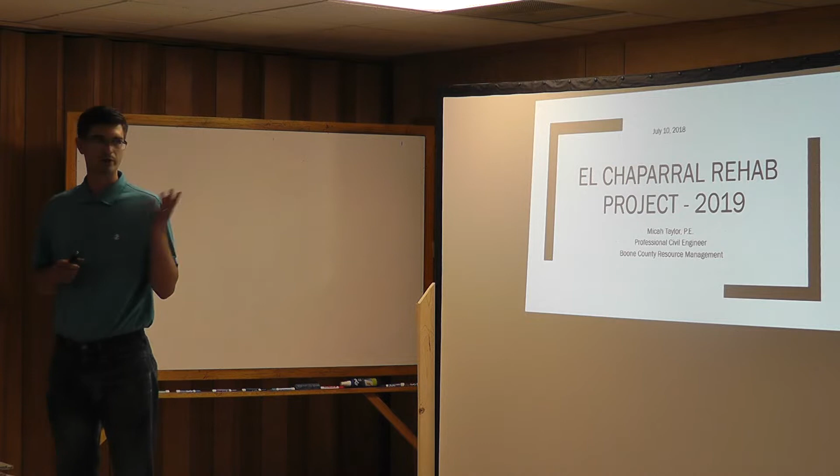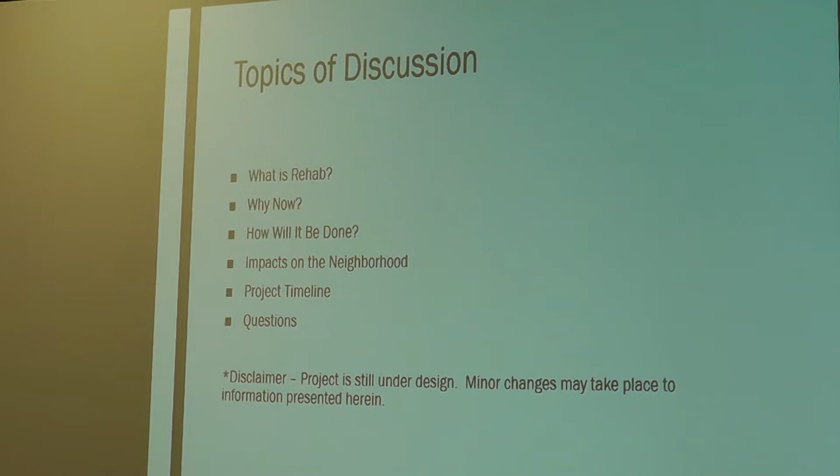Topics I'm going to talk about are what is a rehab project, why are we doing a rehab project now, how will it be done, impacts on the neighborhood, project timeline, and I'll have time for questions. Pam submitted some questions to me earlier. I'll go through some of those, and then we can touch base on just general questions you have.

A little disclaimer I have down here is that the project is still under design. Most of this information is good, it's fine, but there might still be some last minute tweaks. So just keep that in mind. But like I said, I would say a good 90–95% of this information will hold.

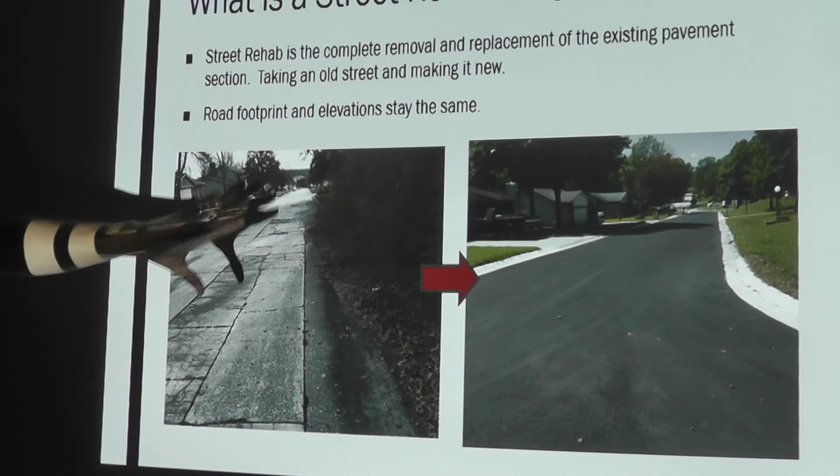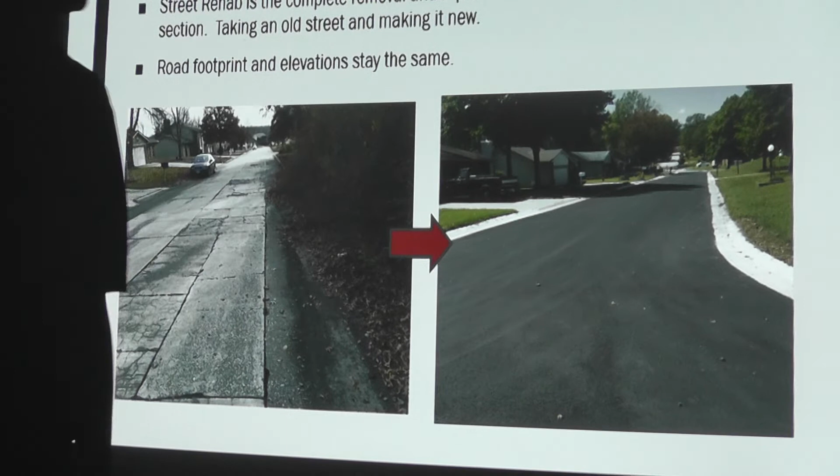What is a street rehab project? Street rehab is basically the complete removal and replacement of the existing street. We're basically taking the old street and making it new again. I know these pictures might be a little hard to see. So this is a rehab project we did last year. As you can see, it probably looks pretty familiar. Got some panels that are failing, some ones that are probably original, and we basically come in and do a whole new street. Minus curb and gutter, but I'll get to that in a second.

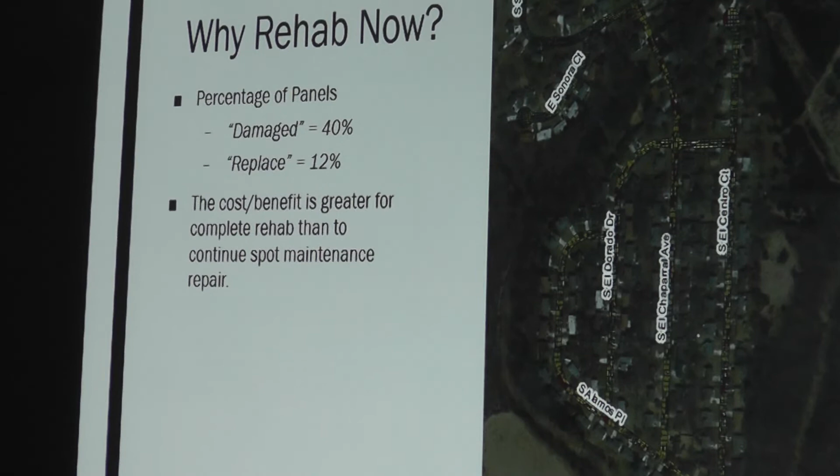Why rehab now? I'll let Charles Barkley answer that question. Basically, the road is not in good shape. And we kind of know this, but how bad a shape is it in? There's about 30 miles of concrete street that the county maintains. And of those 30 miles, we have mapped out those streets to the panel, which is roughly anywhere there's a joint. So that's roughly a 10×10, 10×20 section of road.

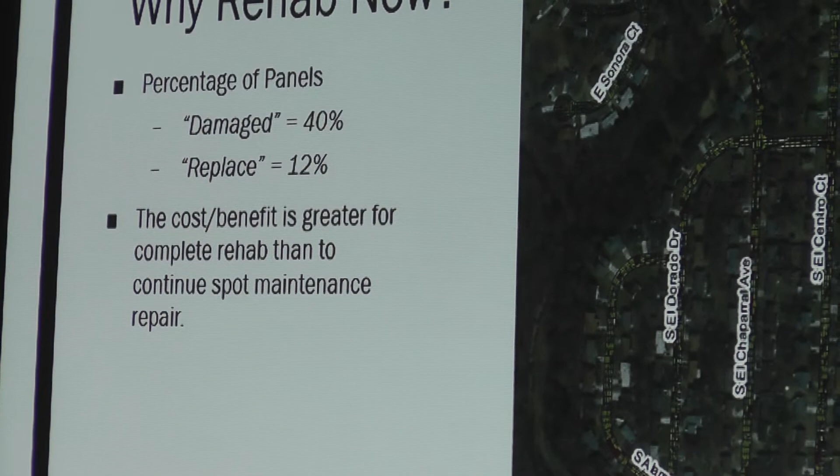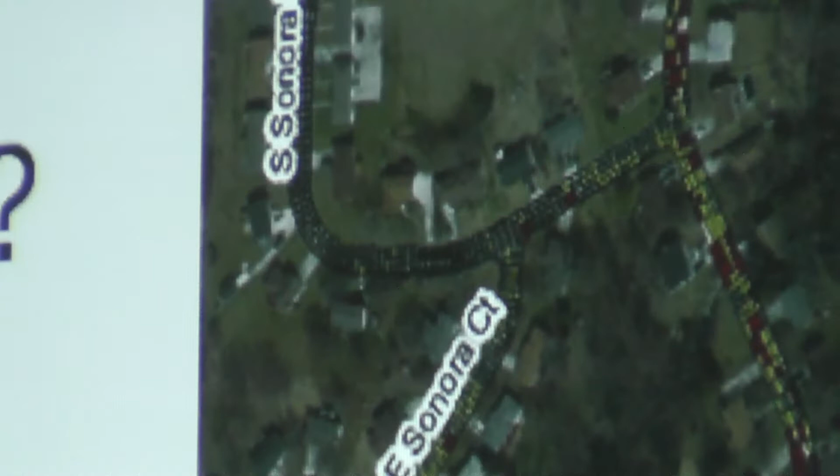I know this picture's not very clear, but every other year we go out and inspect every single panel. And we give those panels a rating. It's either good, meaning that there's really nothing wrong with it, there might be some minor wear to it, or it gets labeled damaged, which means it's got a crack in it, there might be some wear to it, it's just not in pristine condition. And then you'll have panels that we label as replace. So multiple cracks, it's starting to settle, it's losing its structural capacity.

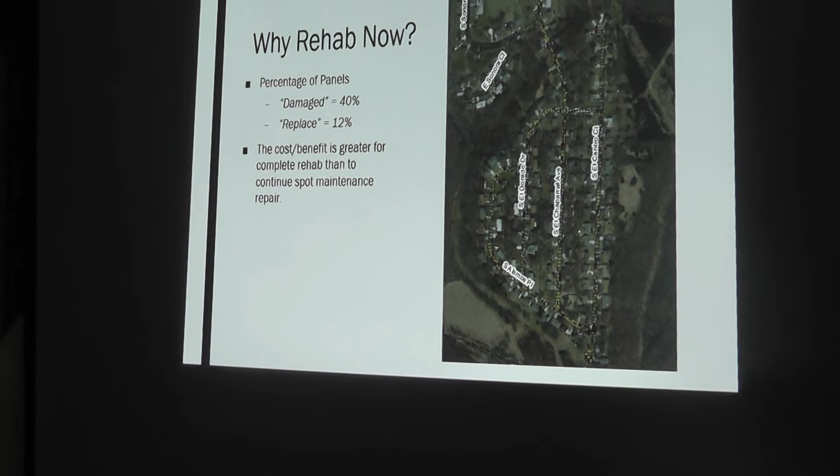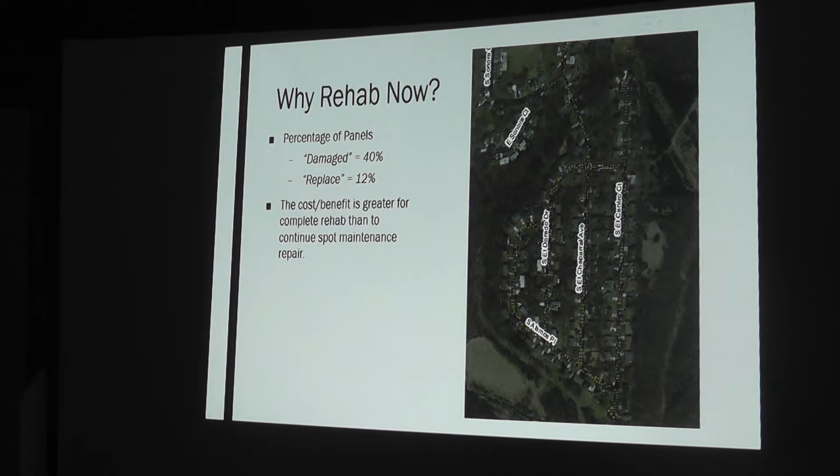So looking at El Chaparral as a whole, 40% of the panels are labeled damaged and 12% need to be replaced. So when we look at subdivisions like this, how we decide if we're just going to do spot repair versus complete rehab depends on these numbers. But sometimes the numbers don't tell the whole story. I don't know if you can see this area, but when you start getting groups of to-be-replaced panels surrounded by damaged ones, obviously we're not going to go in and just replace the to-be-replaced panels when they're surrounded by damage.

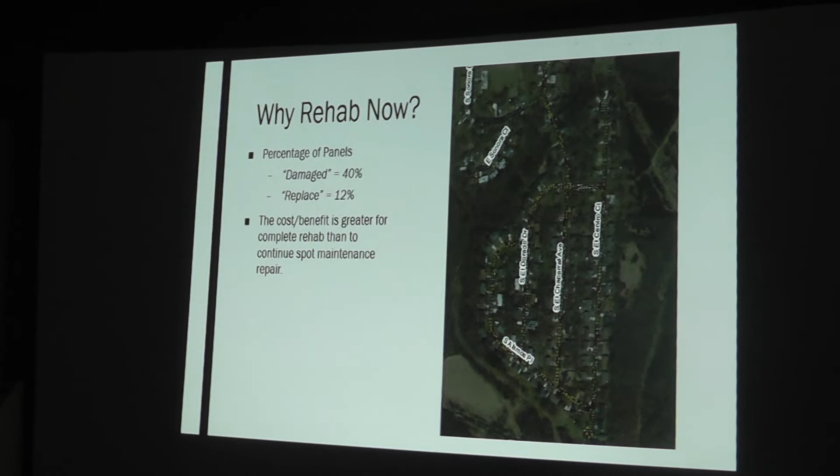So when it gets up in those numbers, it's more cost beneficial to pretty much just start from scratch. And so that's what we're looking at in El Chaparral. And really, those numbers would be higher if it weren't for past work that we've done in the neighborhood. Again, I'm sorry that the picture is a little out of focus, but Sonora Court is in pretty good condition.

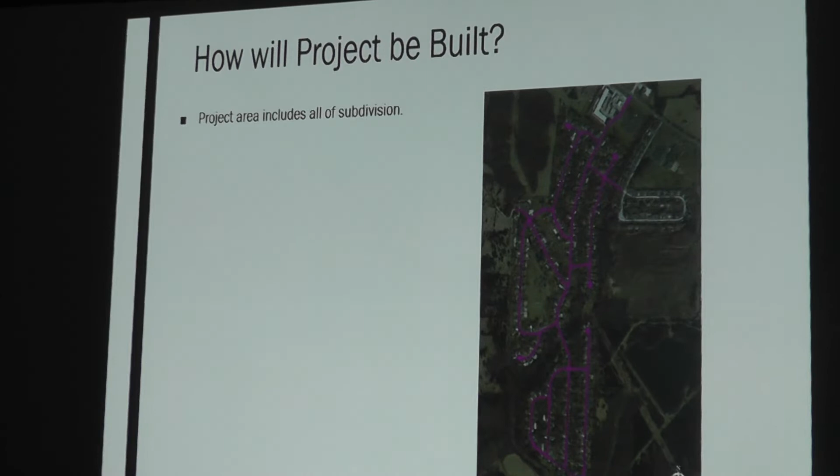How will the project be built? This project does include the entire subdivision minus Rosetta and this loop of Santa Ana. So everything in pink is what we're going to rehab.

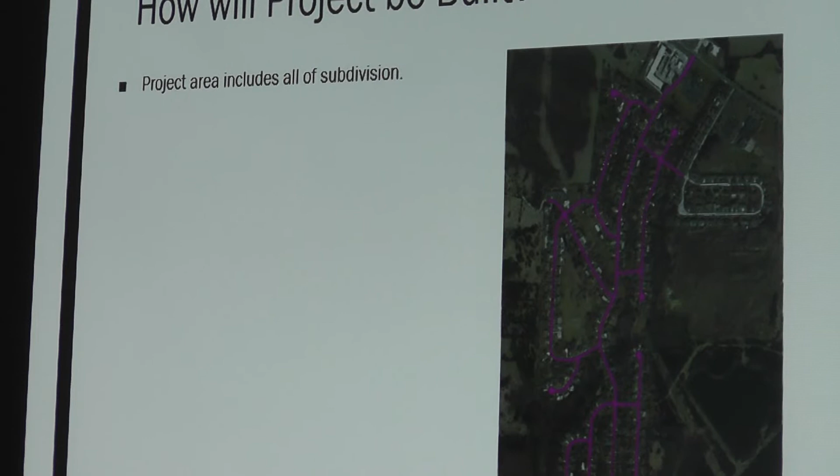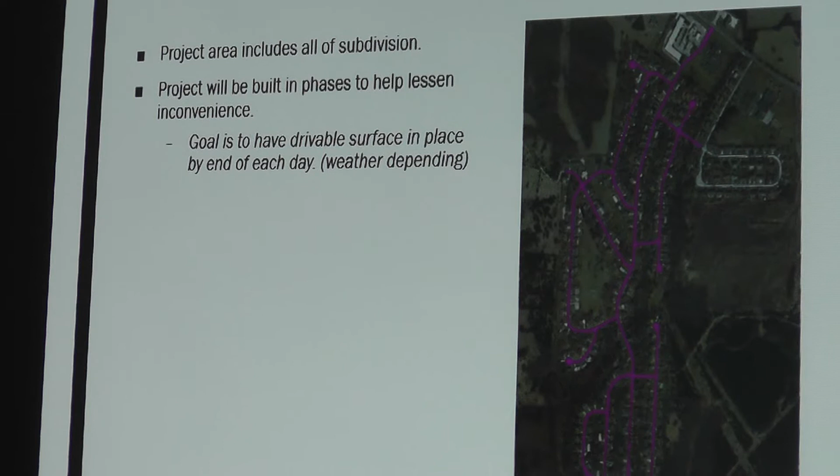The project will be built in phases to kind of help mitigate issues with inconvenience. Our goal is to have a drivable surface at the end of the day. So when we rip out the pavement, hopefully we'll be coming right behind that and putting in some rock or some sort of drivable surface.

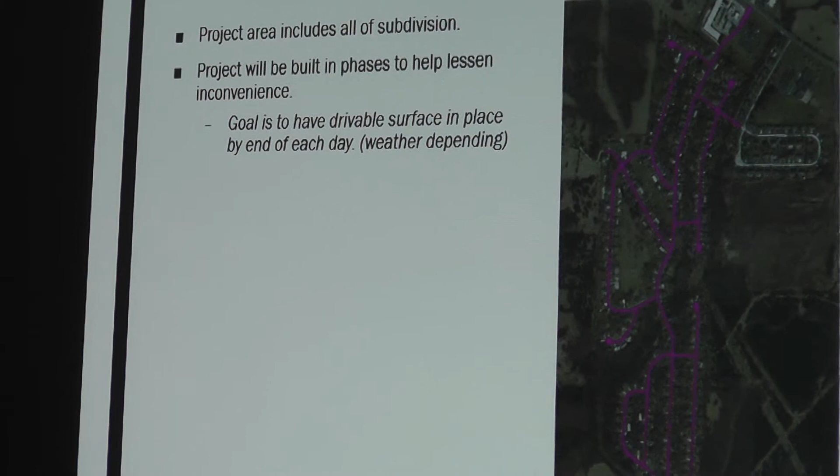What's really going to mess with that is our lovely Missouri weather. As you guys know, and actually I think it happened just yesterday, you guys could get a downpour right in this neighborhood and downtown will get nothing. So sometimes this drivable surface might get affected by pop-up showers, but that is the goal that we're trying to shoot for, to have basically a means that at the end of the day you can get as close to your house as possible.

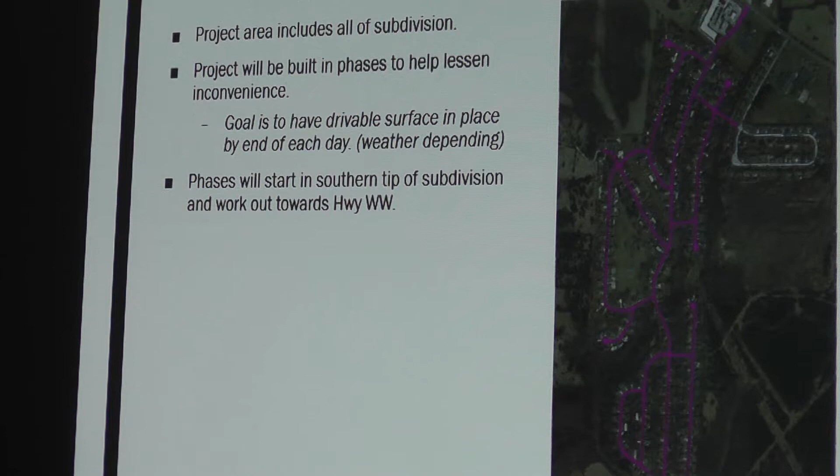So what will you do about the dip and all of us that live behind the dip when you're doing that? I will get to that in a second. Okay. Phases will start in the south. We'll start in the south and we will work our way to WW.

Basically the idea behind that is this project is going to require a lot of heavy trucks. Hauling material in, hauling material out, so it doesn't make much sense to build a road just to have it run over by a bunch of heavy trucks. So we tend to start in the back and work our way out.

The project will be bid with two different options. I put may change because when I wrote this slide, I was waiting on some test results for option 2. And we've since gotten those, but I haven't really digested them yet. So as of now, there's still two options on the table, and I think we'll keep the two options.

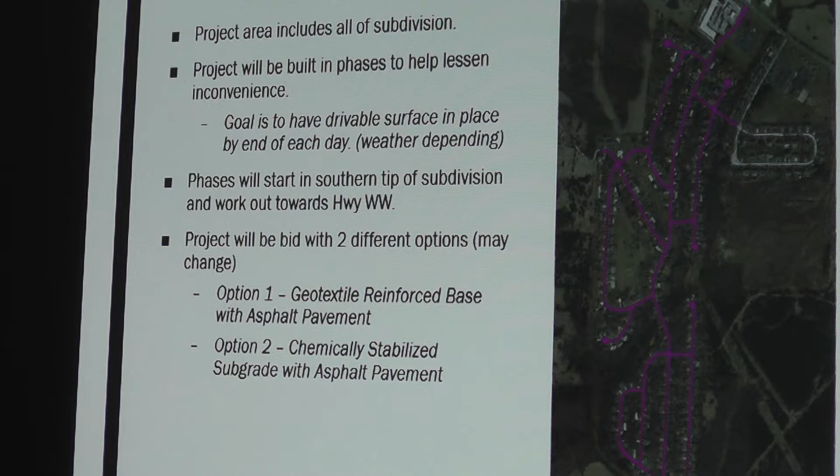So one option is what we call a geotextile reinforced base with an asphalt pavement, and option 2 is a chemically stabilized subgrade with an asphalt pavement. And I'll explain how those are done. So first is the geotextile reinforced base, and I'll go through the steps.

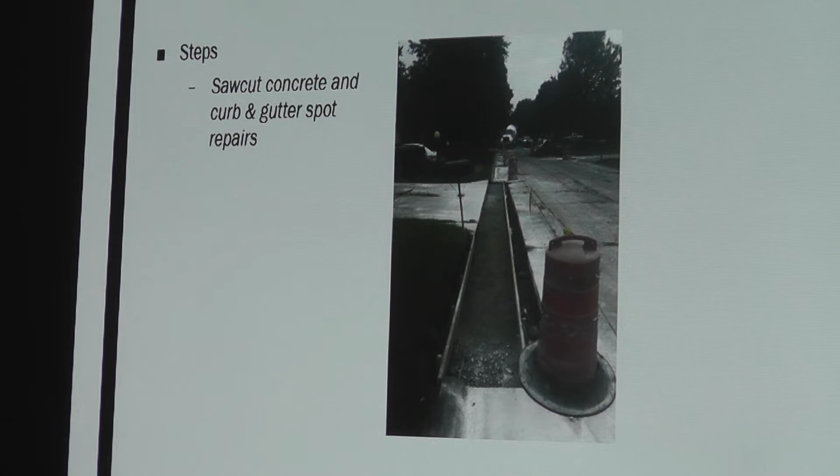So first step is, I mentioned earlier that we're trying to keep as much curb and gutter in place as we can, but we will be making spot repairs. Some of you may have actually seen me walking around the neighborhood. So I walk through the entire neighborhood and I make a judgment. Is that worth replacing? And then I mark all those up, and that's usually the first step of a rehab project, is to come in and make these repairs.

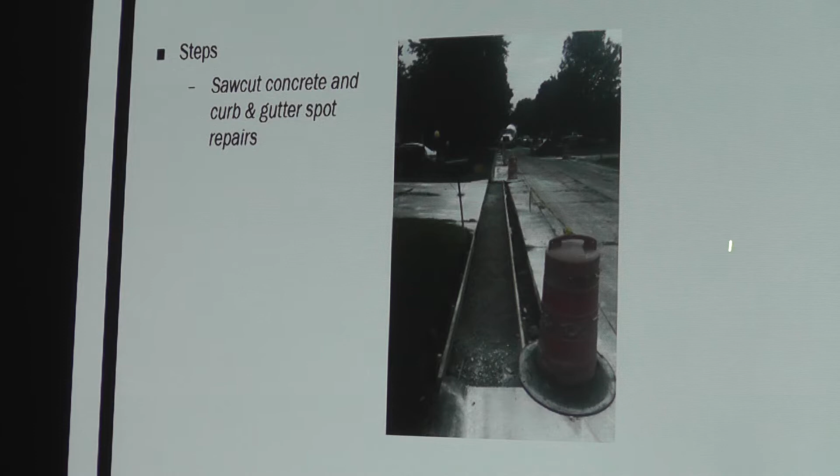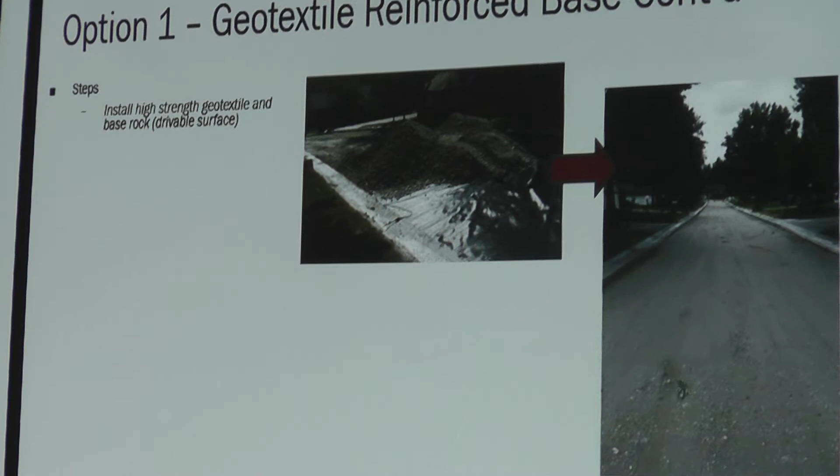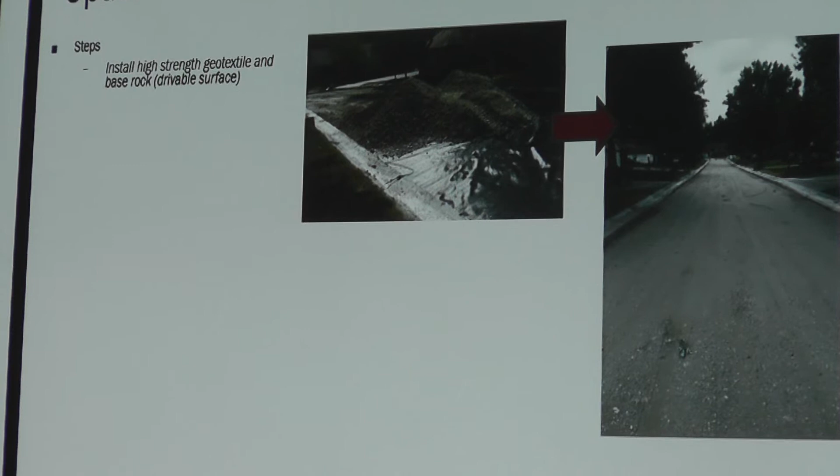And then after that comes kind of the real destructive part, removing the pavement and starting excavation of the underlying soil. You can kind of see that in action right here. Next, we lay a high-strength geotextile fabric like this, and we start bringing in base rock. We bring that to grade and compact it, and it basically kind of looks like a gravel road. And this is what we would call a drivable surface.

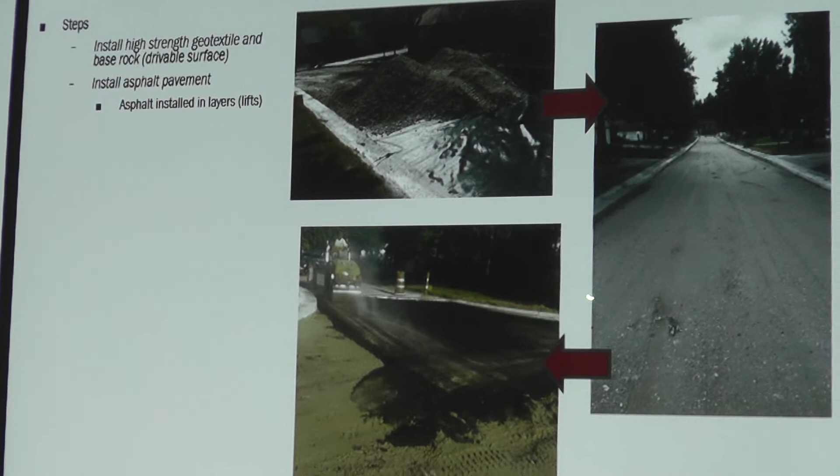Again, it's pretty much a gravel road. We have 400 some odd miles of gravel road in the county, so that's essentially kind of what you might be driving on for a short time. And then after that base is in place, we start asphalt. Asphalt is installed in layers. We call those lifts. Typically, there's 3 total lifts.

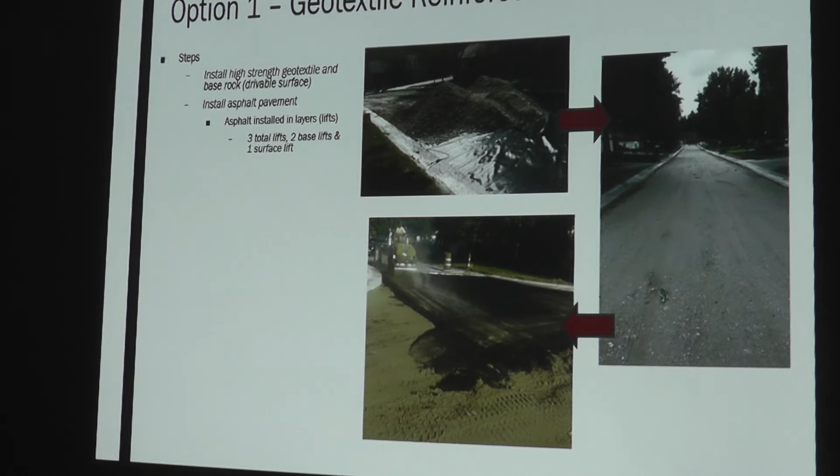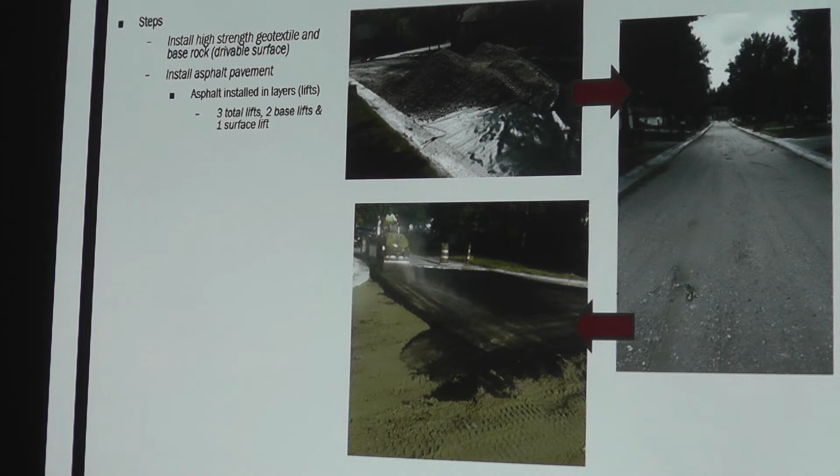We have to limit the thickness of a lift just so we can get compaction on it. The max is about 4 inches. The design calls for roughly 8 inches on this option. So we'll do probably a 3, 3, and 2, or 3, 3.5, and 1.5. And once the surface is done, we're pretty much done.

The surface lifts we will probably hold back on, and we try and do as big an area in one operation as we can. The reason we do that is to limit the amount of joints that are in that surface. The less joints you have, the less water intrusion you'll have, the better your road will perform.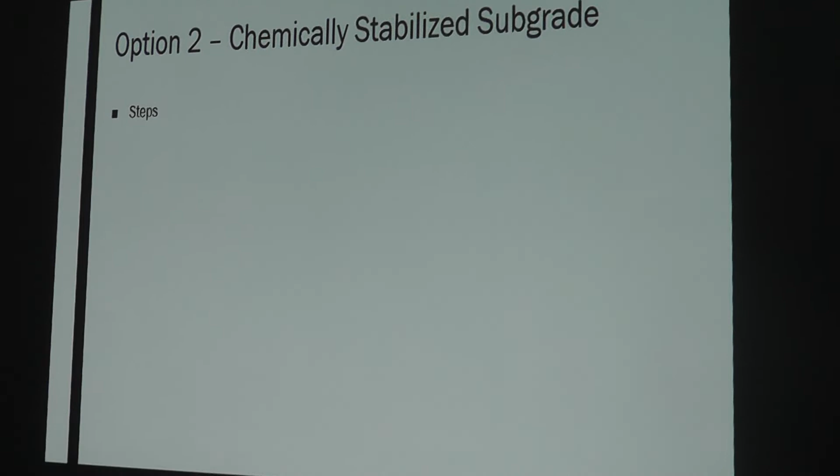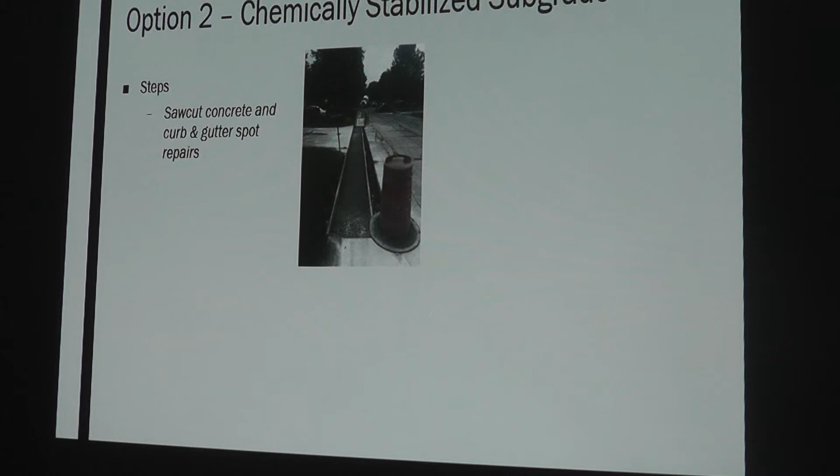Option 2 is a chemically stabilized subgrade. And this is something that we've kind of wanted to try, but we've usually been limited because our typical projects really aren't that large. And this is kind of more conducive to a larger project. And so the steps of chemically stabilized is, again, start with curb and gutter spot repairs, and then concrete pavement removal.

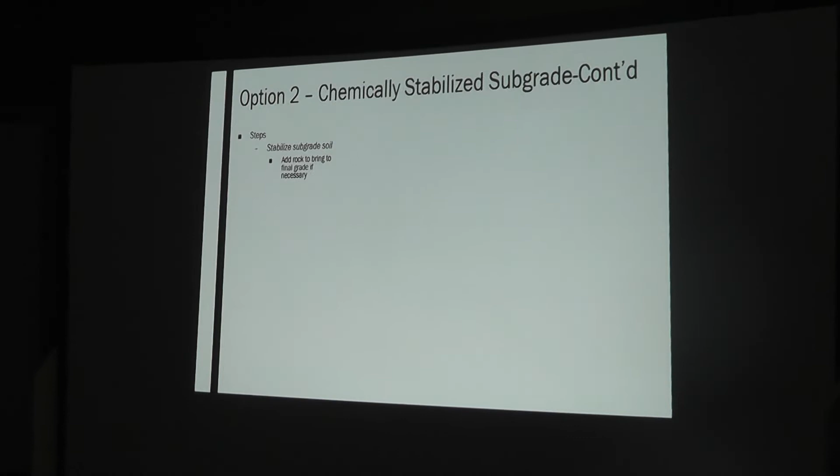The way this subgrade gets stabilized is we might have to bring in a little bit of additional rock, because once we compact this layer that we stabilize, it'll get compacted down, so we need a little bit of material so we reach our final elevation. So we might need to bring in a little bit of rock.

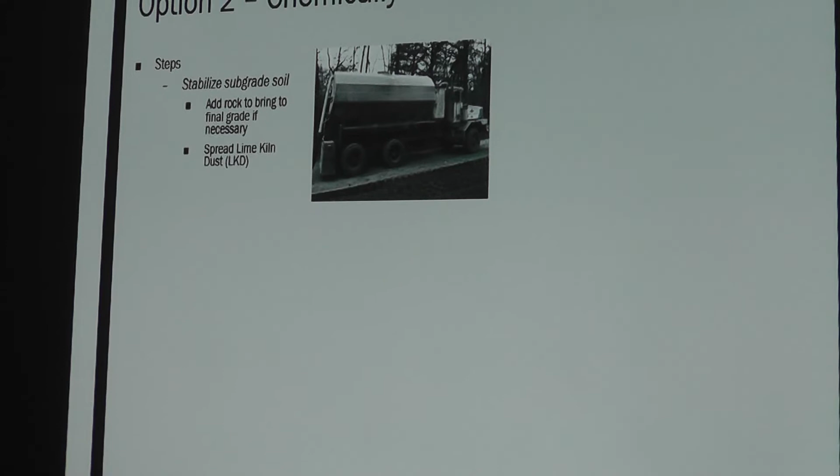And then the chemical we use to stabilize, or one of the chemicals you can use to stabilize, is called lime kiln dust. It's a byproduct of the lime manufacturing process. It dries out the soil and kind of imparts a type of cement bond. It's not as strong as cement, but it's like cement. And so that gets delivered in a spreader truck like this.

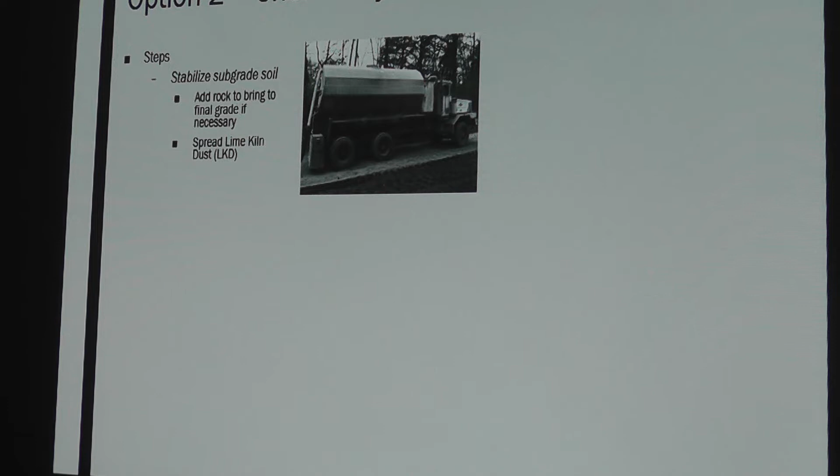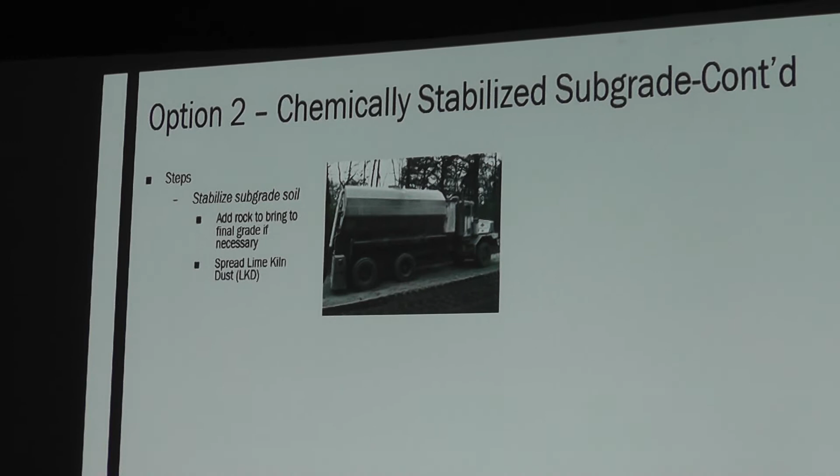It is a fine dust, so there are trucks out there, and I've spec'd the truck in the project. There are trucks that have a mounted vacuum circulation system to try and keep that dust down. Given that this is a residential neighborhood, we're going to try really hard to keep that dust down. So I expect that these trucks should be equipped with that type of machinery.

Once the lime kiln dust is spread, a machine similar to this comes in and mixes the chemical into the soil. Right here is a large drum like this that's full of teeth. That drum spins, mixes the soil. There's a couple different versions of a stabilizing machine like this. This is a self-propelled one.

You can get basically the brains of the machine, the spinning drum, as a standalone thing that gets pulled by a tractor, or a standalone attachment that gets attached to a different piece of construction equipment.

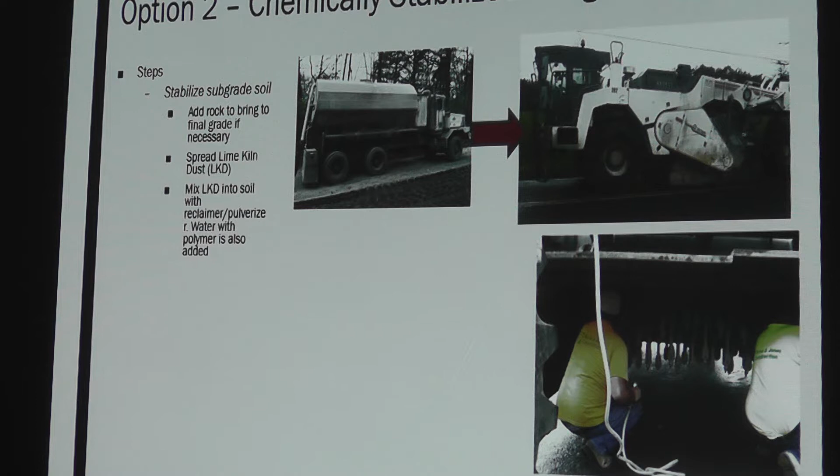And so this machine will go along, mix up the soil, and then it has a hose that attaches to a water truck, adds water to the lime kiln dust, activates it, and then right behind the machine is a compactor that compacts the soil down. Once that's compacted, it'll cure for 5 to 7 days. But local traffic should be able to get on the soil right after that compactor. So that would be your drivable surface in this option.

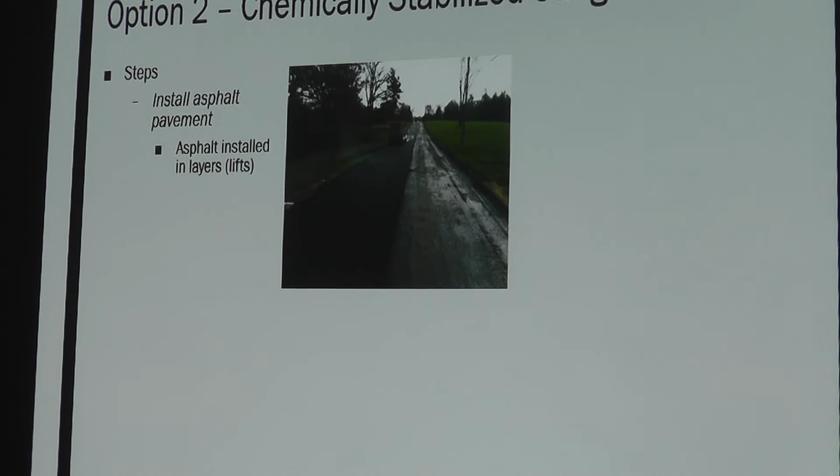Once it's done curing, it'll be, again, a very hard, essentially dirt road. And then the asphalt will be put in place. And again, asphalt will be installed in lifts. This particular design, the asphalt thickness, I think it's going to be a little bit less. So they might be able to get it done in 2 lifts. But worst case scenario, it's going to be 3 lifts again.

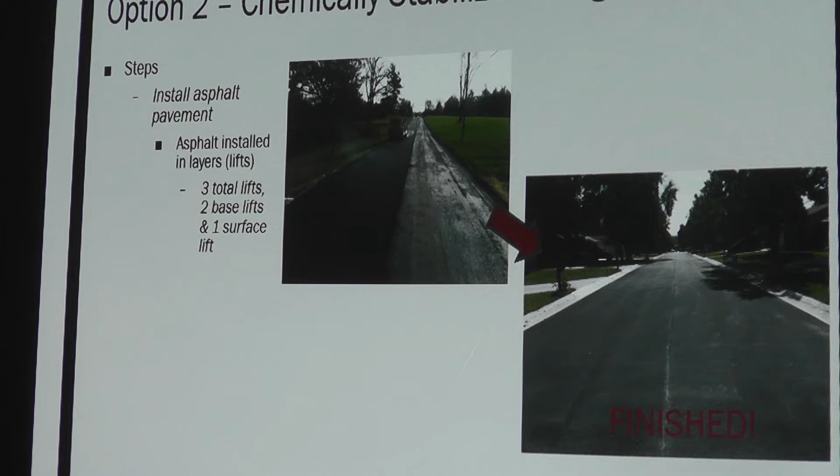Impact on the neighborhood. I'm not going to sugarcoat it. This is going to be a noisy, dusty, very inconvenient thing. Sounds like it. Yes. Right. Like I said, I just want to put that expectation out there. I mean, I've done this 4 or 5 times now.

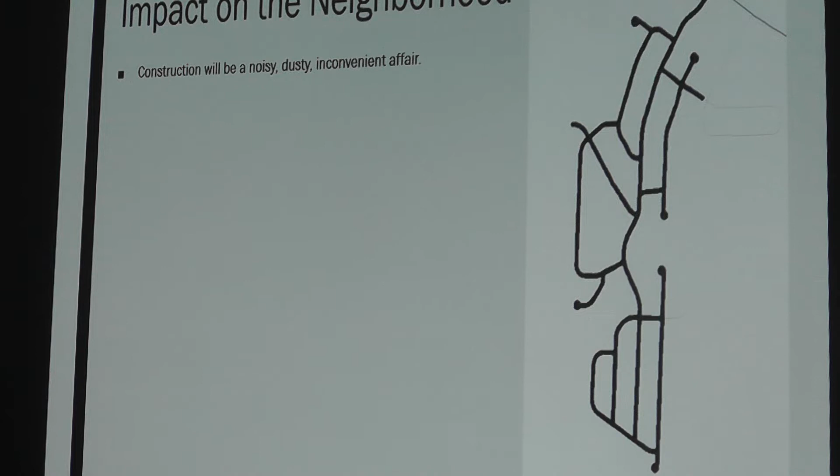And the way we try and combat that is we try and just keep our heads down and get through it. Let's try and get this project done as quick as we can. That way you guys can get back to normal life.

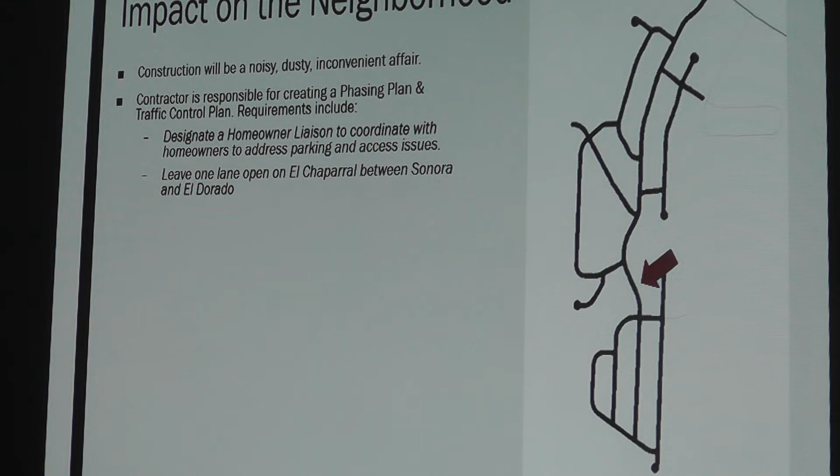One of the questions that Pam submitted to me was, when will my house be affected, for how long? That is not an easy question to answer, given that there is no way for me to guess what a contractor is going to do as far as how he's going to tackle this project.

And so the way we handle it is we require that the contractor submit to us his phasing plan, traffic control plan. And a requirement of that plan is for him to designate what we call a homeowner liaison. That liaison is responsible for coordinating with you guys on a day-to-day basis. So typically what's done is he knocks on the door, maybe puts a postcard in your mailbox and says, I need you guys to park over there. I'm going to be working from here to here.

Again, we kind of do this because, you know, I can make a 5-page plan of the different stages, but a contractor might say, well, that's not really efficient for my operation because I can put 20 guys on this project. But another contractor might say, well, I'm going to do it in smaller chunks, so I'm going to have 5 guys. So that's why we don't really make the plan. We let the contractor who knows his crews, knows his abilities, submit the plan to us.

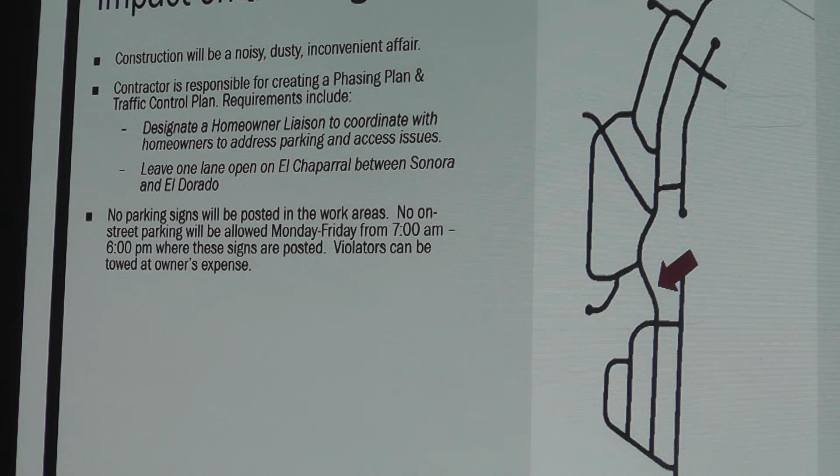The county has a lot of these small no parking signs that we sometimes deploy on these projects, and basically the sign has reference to an ordinance that gives us the authority to tow people that might have a vehicle that's been left and we can't find the owner. And so to keep things moving, we put these signs out that say no on-street parking Monday through Friday, 7 a.m. to 6 p.m. Again, some contractors will put in 4 12-hour days, so they might actually follow this 7 to 6 p.m. Some might say, well, I know there's going to be a lot of traffic at 5, so I'd like to get out of here by 5.

So again, these signs, you need to pay attention to them. However, again, the person to follow instructions from will be the actual contractor. Our on-site inspector might also get involved, but really the contractor is in charge of his work site, and so he'll have the control and hopefully the wherewithal to tell you where you can park and where it might not be too good of an idea to park.

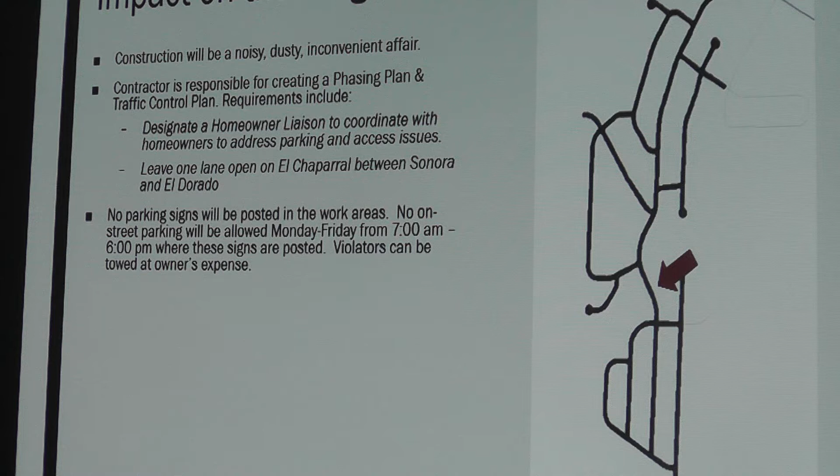Like I mentioned before, the goal is to have a drivable surface at the end of the day. And like I mentioned before, weather can affect this. I put it in the contract that the drivable surface can only be in place for a max of 10 working days. A working day is Monday through Friday, and I think the technical term is a day on which they can work 6 hours unimpeded due to weather. And so that drivable surface, whether it be the stabilized subgrade or the reinforced rock base, should only be in place a max of 10 days. It should be less than that before the first lift of asphalt is down.

We like to get that first lift of asphalt down as quick as we can, mainly to keep water from getting into the underlying soil, the rock base. Once water gets in there, it can start losing a little bit of its strength. So we push real hard to get that first lift on. Direct driveway access might not be available until the second lift. That second lift, or the final lift, is typically 2 inches to 1.5 inches. So there'll still be a little lip right there in front of the driveway.

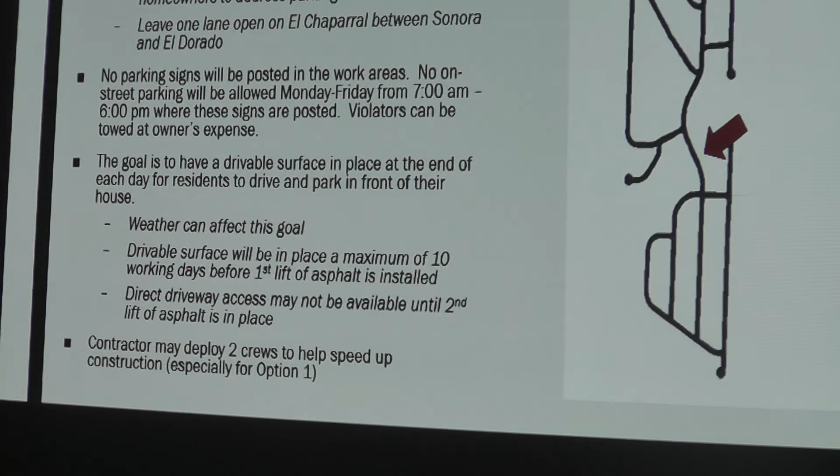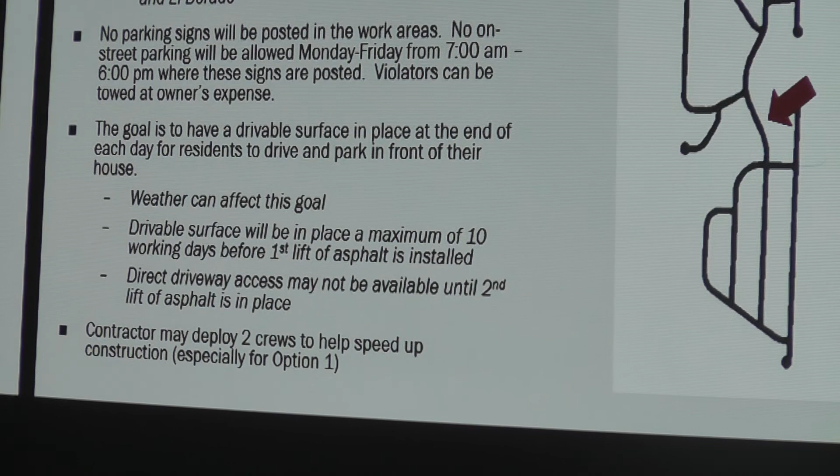One thing I'll mention is that there is a possibility that a contractor might try to deploy 2 crews to get this project done faster. This is something that I think we will suggest, but it's not a requirement. So the way that would work is that there would be 2 demolition teams, one starting here and working on the south bulb, and then probably one starting at Sonora Court and working on the side streets.

And then those 2 operations will probably get done pretty close to one another, and then it would just be El Chaparral to try and work our way out. Again, it's not a requirement, but there are some contractors out there that their business model is speed, and so they might do the math and say it's better for us to do this.

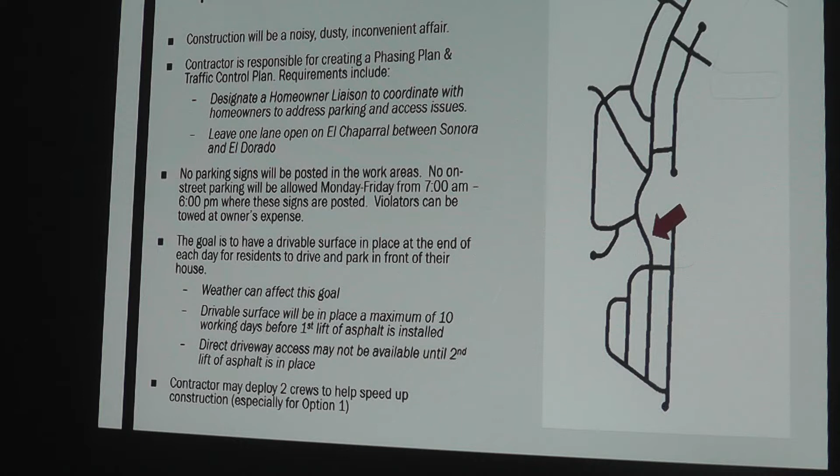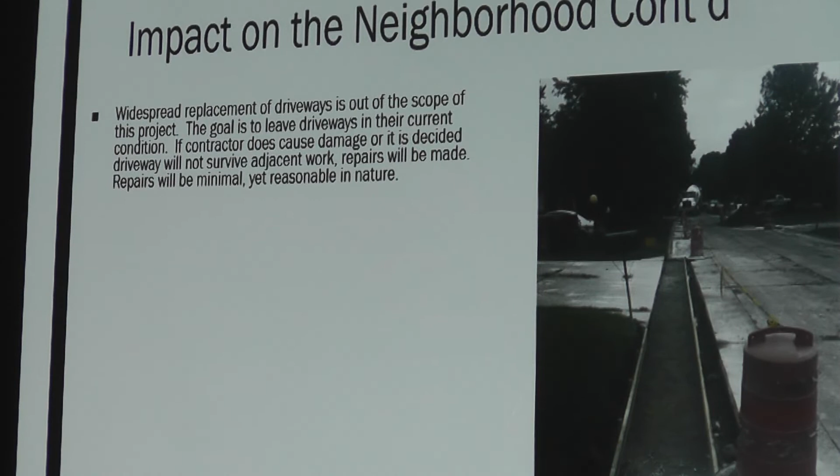Widespread driveway replacement is out of the scope of this project. There will be curb and gutter repairs in front of driveways like this. So we try and be as careful as we can to get that repair done. You know, walking through the neighborhood, I do know that there's driveways out there that are not in great shape. So even working near them might cause a problem.

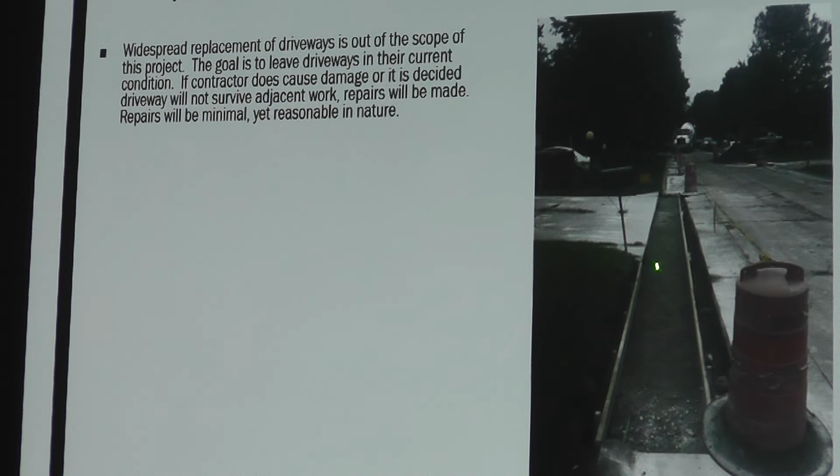So if a contractor does do some damage, we will repair that. But I just want to put it out there that our repair will probably be as minimal as we can, but as logical as we can. So what I mean by that is, concrete has joints in it. So it makes sense to try and take it to the closest joint. But if your closest joint is 10 feet away, we're not going to replace 10 feet of driveway just to get to a joint. We'll probably cut back maybe 3 feet or something.

Like I said, our main goal is to leave stuff in the condition it's presently in. We usually go around, take pictures of every driveway, just so if there's some disagreement, we at least have some record that says, well, you might think that crack is new, but we took this picture a week ago and it was there, and we weren't here yet. So just something to keep in mind.

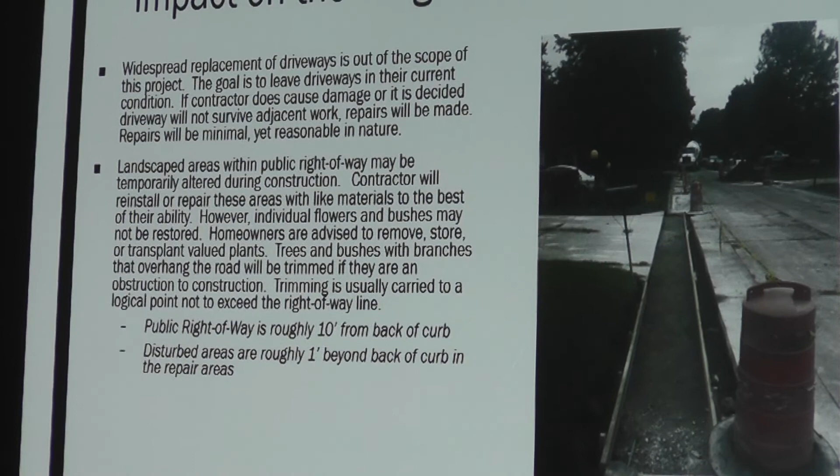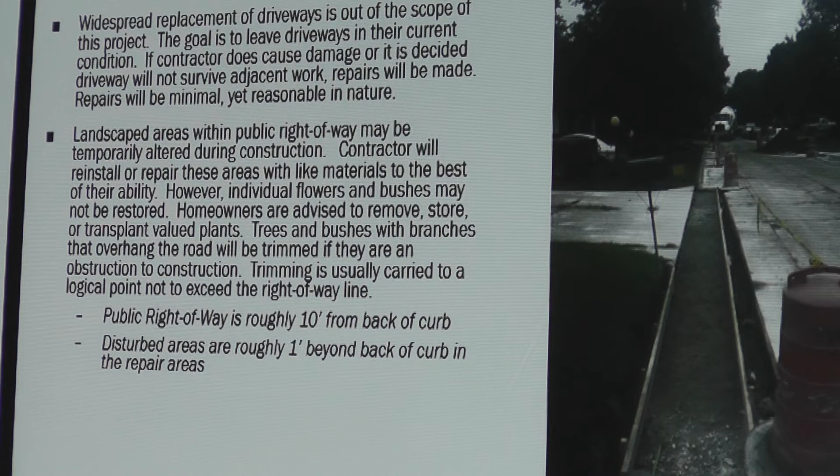Landscaped area and public right-of-way. Landscaped areas can be disturbed. If they are disturbed, we have it in the contract that the contractor is to restore those areas with like materials. So in this instance, there's a mailbox right here, and if you had a flower box or something around this mailbox and you had nice brick pavers and whatever, the contractor might take those, set them aside, do this work, and then he's supposed to put those back and remulch.

Now, one thing I will say is individual plants, trees, bushes, probably something that we won't mess with or won't replace. So I have it in the contract that the contractor, if he comes across things like that, he should knock on the door and at least give you the chance to dig them up, transplant them, do whatever you see fit.

The other thing is trees. This is another good picture where you can kind of see this concrete truck and these tree limbs. Dump trucks are pretty bad at catching branches. Once they raise that bucket, they're already a tall vehicle, so now they're twice as tall. So if we need to trim trees, we will. Again, we'll try and do that in as clean a manner as we can, and as little as we can. But the place that we typically stop is the right-of-way line. Public right-of-way is roughly 10 feet from back curb.

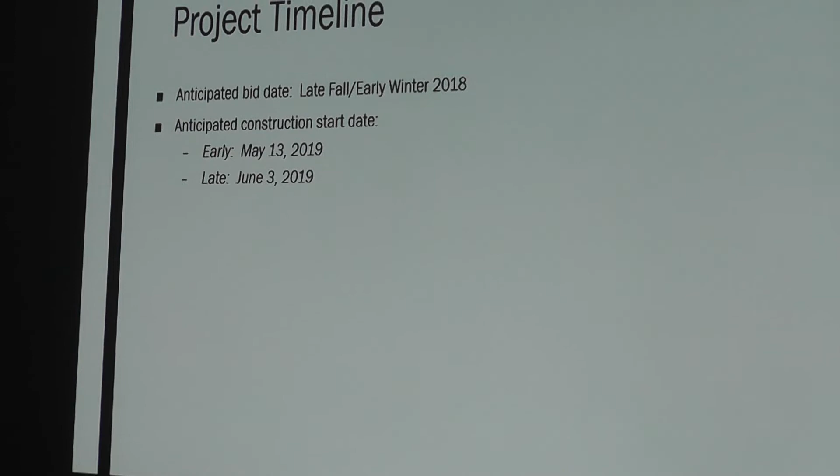Project timeline. Like I mentioned before, the project is under design right now. Anticipated bid time is late fall to early winter of this year. Anticipated construction start date, we're giving the contractor a window, basically saying you can start as early as May 13th of 2019 or as late as June 3rd.

Something different that we're going to try with this project is the bidders will submit their own timeline. Typically on projects, we say, we want you to reconstruct the street from A to B. You have 40 weeks. And if you go over your 40-week mark, you get charged what we call liquidated damages, which we set differently for different projects. Sometimes it's $500 a day, sometimes it's $1,000 a day.

But on this project, since it's so large and we have the two options, it's hard to really gauge what sort of contractors will bid this project. We might even get some larger out-of-town contractors. And so we thought the best thing to do is not say, okay, you have 35 weeks. We said, how about you tell us how much it's going to cost and how quickly you can do it. And so we're going to evaluate the bids on a dollar per day type of situation.

That way, like I mentioned before with the two crew situation, if we have someone that says, hey, we can get this done in 20 weeks, or roughly one season, I think that's good news for you guys, that's good news for us, but is that $1 million more than someone who's going to do it in 40 weeks? I can't answer that. They can answer that, and they will answer that when they submit their bids.

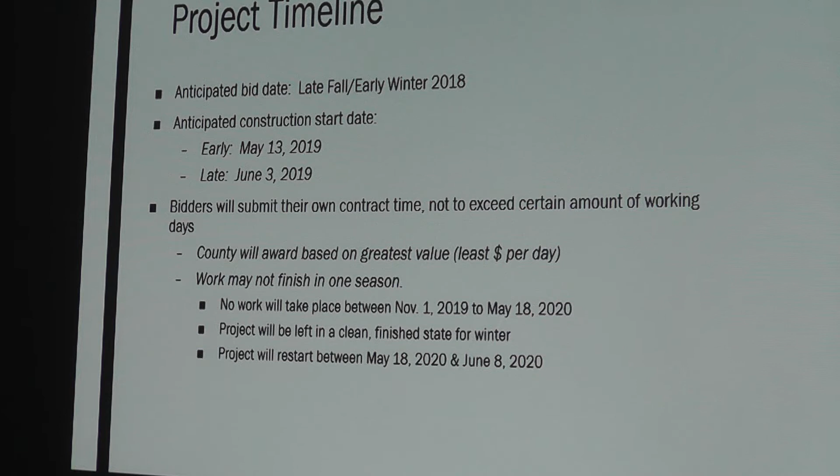So we've set in the contract that work will cease November 1st, and the work will be taken to a finished state. So that means, let's say we were going to do this project in smaller increments that spanned multiple years, we would stop at an intersection or somewhere that kind of made sense. So that's kind of a requirement that the contractor needs to pay attention to what he's doing and not just say, oh, it's November 1st, I'm gone.

He will leave it in a finished state, and basically no work will happen through the winter. And then work will start back up again in May of 2020. And hopefully it will be done by the end of that season. And again, that's where the maximum days come into effect. So we could get a contractor that is going to say, I'm going to go ahead and put my contract time at the max you gave. Well, if he starts running over that max, liquidated damages are going to kick in.

And for this particular project, since the contractors are picking their own time, to dissuade someone from being like, oh, I can get it done in 3 weeks, that's a guaranteed job for me, well, we're going to jack up the liquidated damages pretty high. So hopefully that will kind of keep them a little bit honest on that.

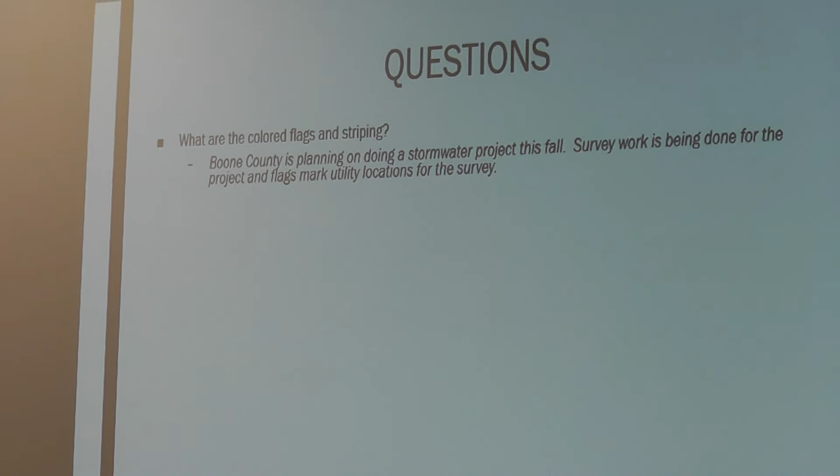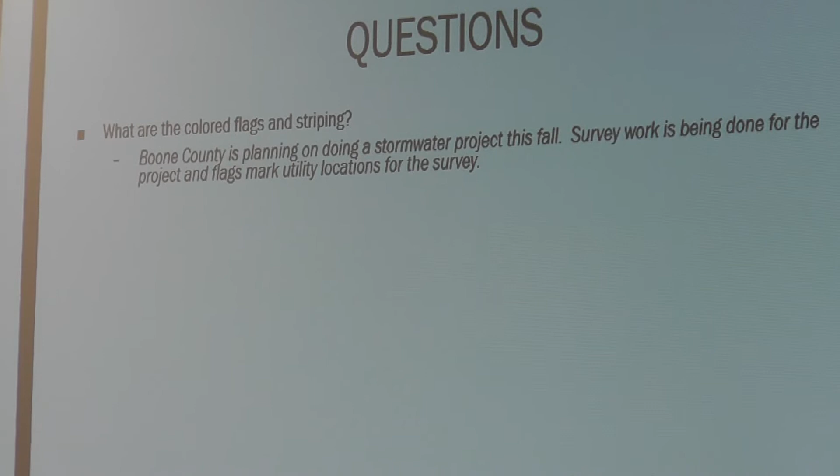All right, and these are prepared questions that Pam submitted to me. What are the color flags and striping through the neighborhood? In preparation for next year's road rehab, we evaluated the stormwater situation, and we discovered that there's a couple crossroad pipes that are in bad condition. So our surveyor's been in the neighborhood collecting survey data, and I'm hoping to squeeze a project out this year to replace those stormwater inlets and pipes.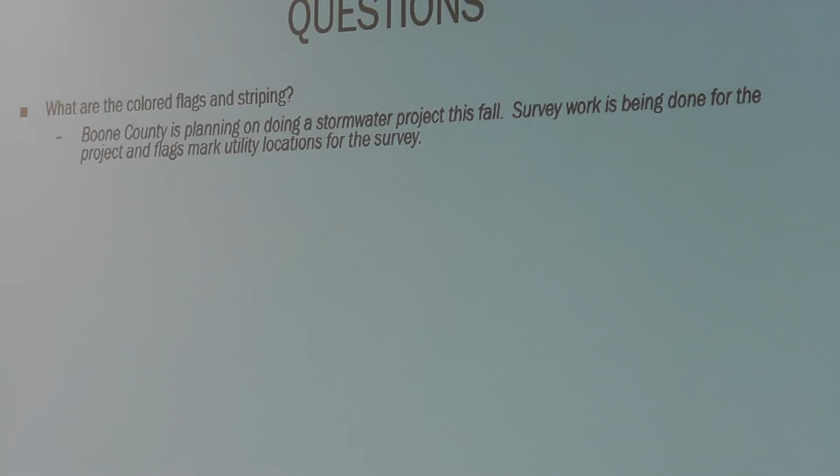There's 4 locations. One is next to Pam's house, one is on El Dorado, kind of that north curve, and then the other is just north of the southern cul-de-sac of Pecos, and then the other one is on Sonora.

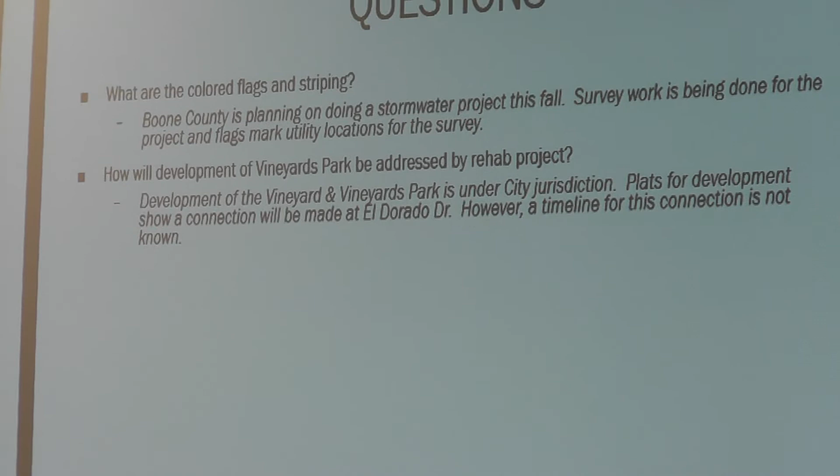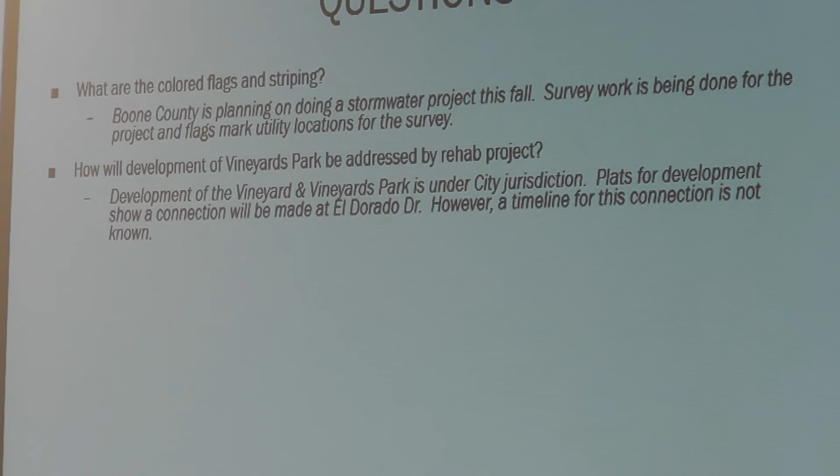How will development of Vineyards and Vineyards Park be addressed by the rehab project? Vineyards and Vineyards Park is in the city limits. Really, the county has no jurisdiction over that development. We have copies of the plans of that development. And it's my understanding that at some point in time there will be a connection made at El Dorado that will connect up to the Vineyards. I have no timeline of when that will be. That could be a couple years from now. That plan could get scrapped and they might do something different. I don't really know. So it's really nothing that affects this project in any major way. So

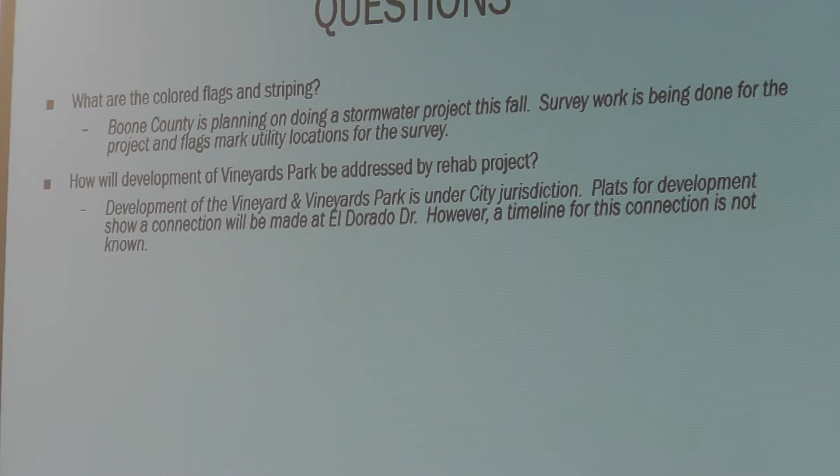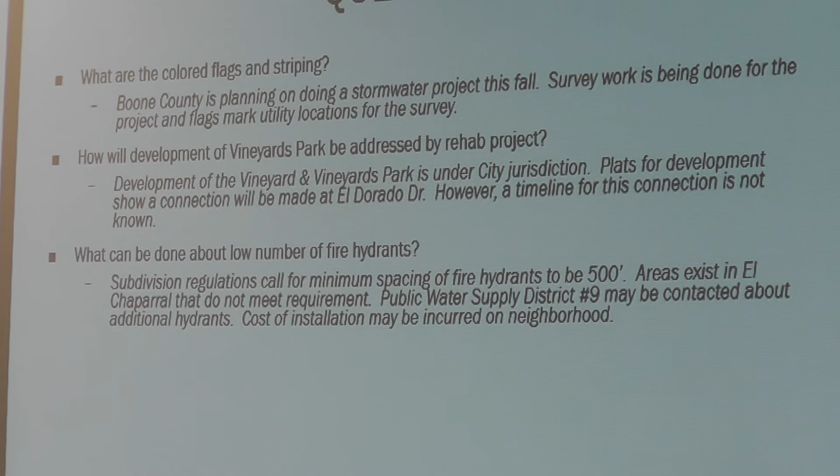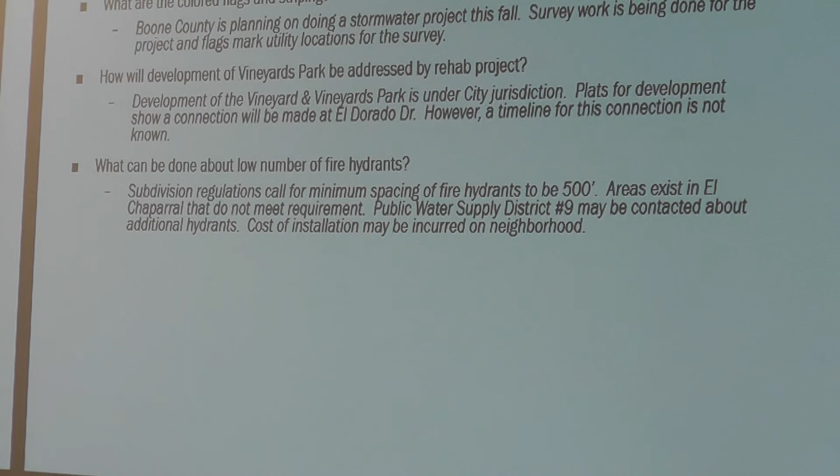What can be done about the low number of fire hydrants? I've reached out to Public Water Supply District number 9 that supplies your guys' water. Our subdivision regulations specify a minimum spacing of 500 feet on subdivisions. This subdivision was built before these regulations were in place, so the water district sent me a map of their fire hydrants, and yes, there's areas that don't meet this 500-foot requirement. And so basically what the district has told me is that they can install additional hydrants, but they're looking for someone to pay for them. So I think you as an HOA would probably...

Not an HOA, no, 501c3, we got no HOA here. Yeah, just saying. Dues, $15 a year, optional. Just want to clarify, before there's mass hysteria. Okay.

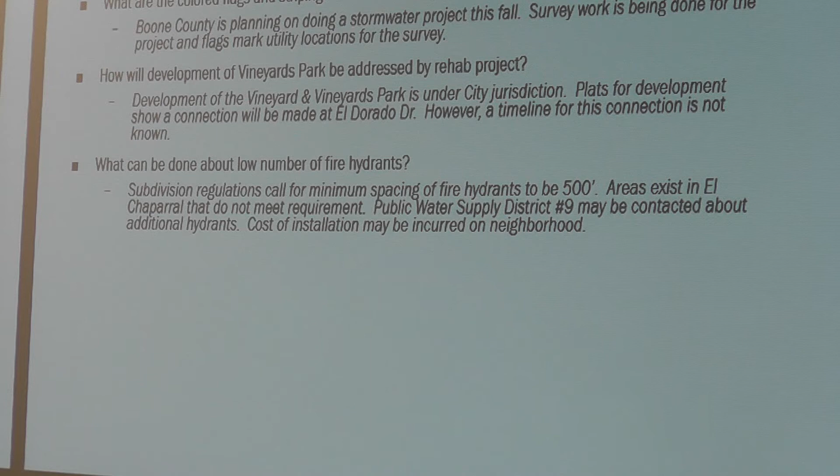Basically, they would look for someone to pay for them. Again, from what the district has told me, the hydrants are in place now. I'm not quite sure how they got paid for. I don't know if they're funded through the fire district, but that's something that the county probably won't get involved in.

Will a traffic study be done for this project? Short answer, no. Basically, like I mentioned before, rehab project, we have a street that's failing and continues to fail, we need to start from scratch. So, you know, the value of knowing that 2,000 cars a day go past Casey's or on the lower part of El Chaparral doesn't really affect the design or really what we're going to do with this project very much.

Will stop bars be painted at stop signs? Our traffic safety manual does indicate that if a location has a history of people not obeying the stop sign, that a stop bar might be considered. I'll emphasize the might, because kind of from our standpoint, if you're not obeying a sign, a white paint marker might not persuade you either. And every year we try and keep up on our painting and our striping. So again, it's something that we have to have crews deployed out here to paint them.

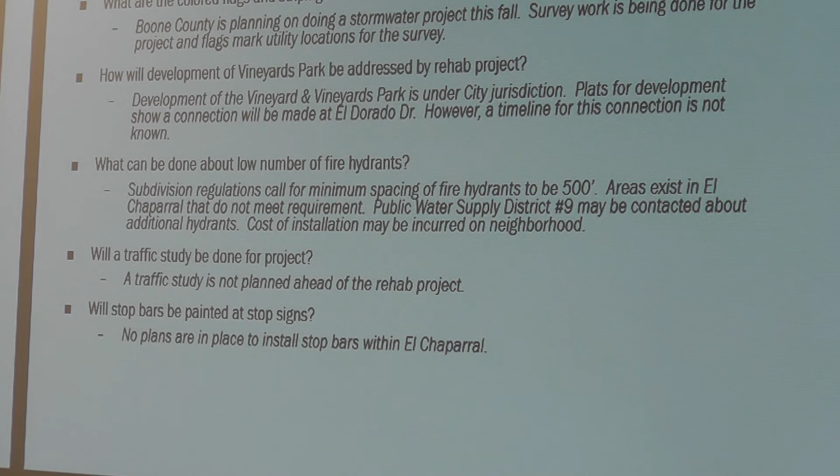You were talking about the 4 drains, and I don't think one of those was at that dip on El Chaparral. That area doesn't take hardly any rain to get this much water over the road. Now, how much of that is a clogged drain versus something that needs to be replaced, I don't know. But if you're not going to fix that in this project and you're going to have pavement instead of concrete, you're going to wash that road out there. Just so you know, that area doesn't take hardly any rain to flood.

Almost enough that you worry. I've seen 4 or 5 times probably in the last 2 years that you worry about whether you should drive your car through it. I live on it, I see it all the time when it rains. So I think you need to look at that drain as a part of this project if you haven't, and put it in your bid to fix whatever the problem is there. I would say

there's a couple things. That dip does have grated inlets. In my opinion, grated inlets clog easily, and that's why typically when we're replacing inlets, we go with what we call the Type M, or modified Type M's, which are the more curb opening ones. The issue with those grated inlets down at the dip is that they are a box that sits right on top of those pipes that go under the road.

So to take them out, we would have to patch that pipe, and then we would have to try and shift the low point of that road somewhere uphill, either way, and then those inlets would probably have to have their own separate pipes down to the creek.

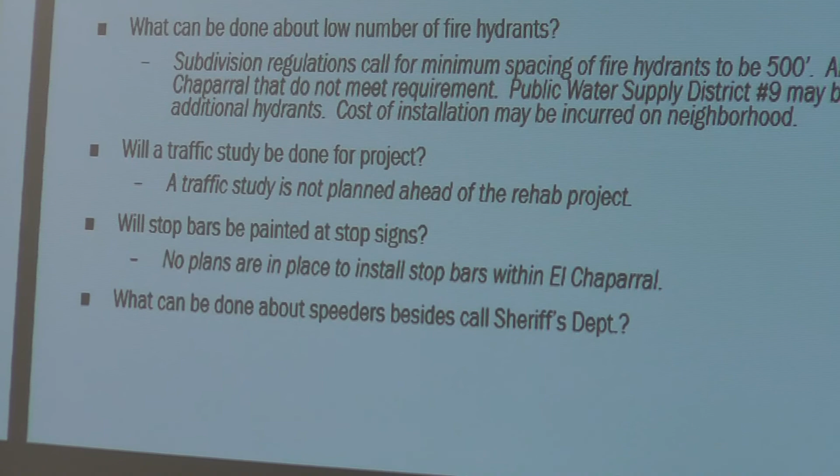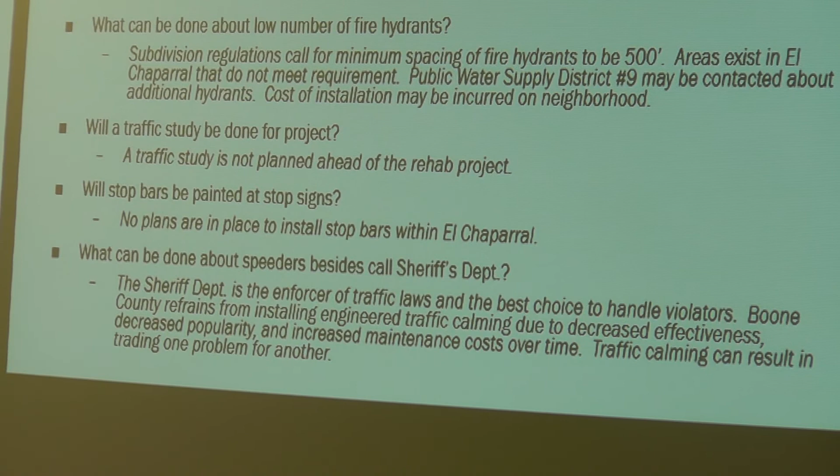So, before we get to one more question, I actually have one more question. And I thought this would probably spark the most debate and questions. What can be done about speeders besides call the sheriff's department? The sheriff's department is the enforcer of traffic laws. So they are the best people to call when it comes to traffic violations. We refrain from installing engineered traffic calming, basically because over time we feel that there's a decrease in the effectiveness, a decrease in its popularity, and an increase in maintenance costs.

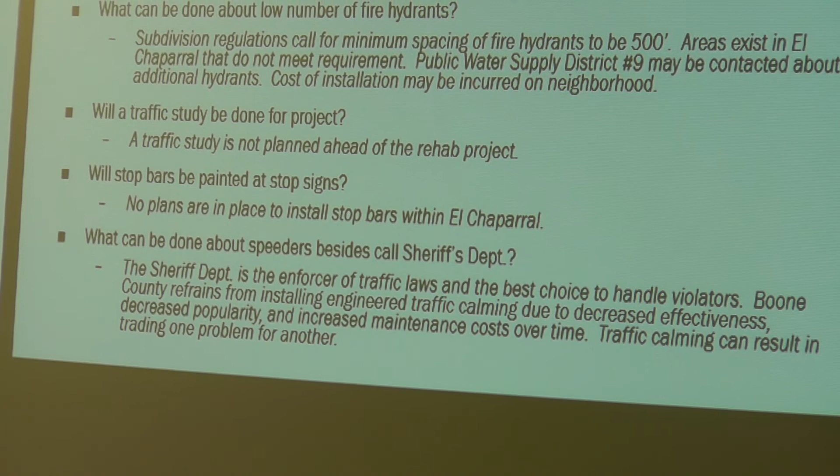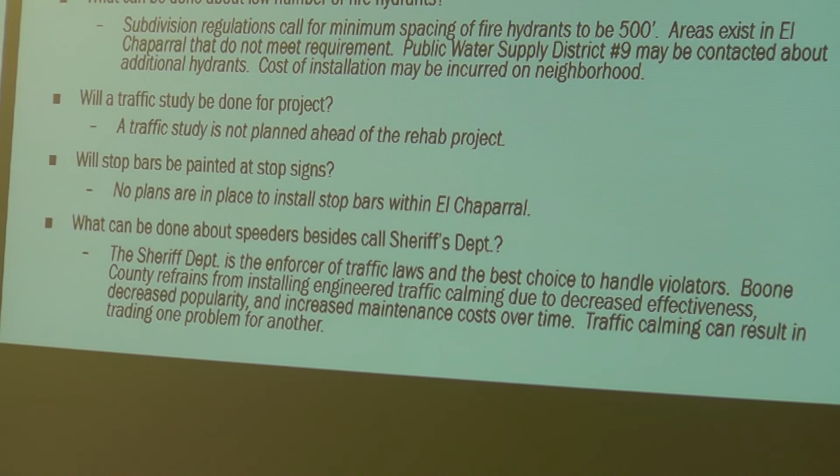So traffic calming is kind of, from our standpoint, trading one problem for another. If you really look at traffic calming and what it's trying to do, you're basically forcing discomfort onto a driver. So if it's a speed bump or a speed hump, you're throwing an obstacle out there for a driver to force them to slow down, or you're going to hit this and maybe damage your car. Other traffic calming measures are adding texture to the pavement, chicanes, or narrowing the road.

I'm Irene Diagula, and my question is, we just bought this house a year ago, it was built like '72 or something. But as your little curb comes up, I have this really nice brick mailbox structure. So if you all come up, will they just knock down my brick mailbox? Do you live on Victoria Court? Yeah. You saw my pretty guy? I did. Is he going to still be there? I'm hopefully going to stop short. Yay. I think you did have a little bit of damage there to the side, so I'm going to try and address that. But yeah, I saw your mailbox and I'm trying to avoid it. Thank you.